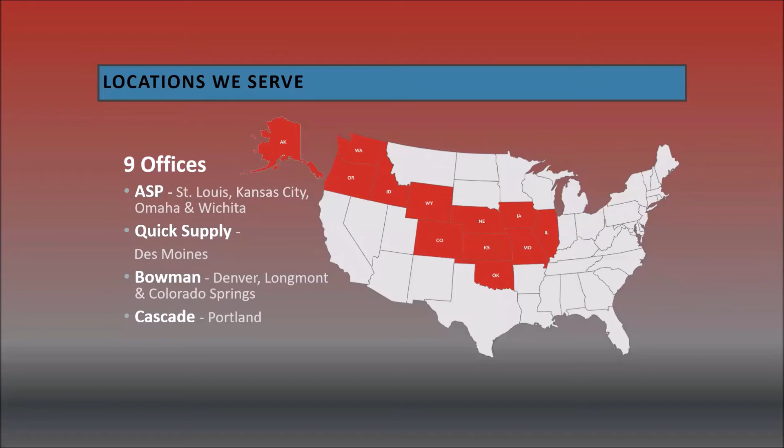I will not expect Tim Lancaster to say ASP Enterprises, Quick Supply Company, Bowman Construction Supply, or Cascade Geosynthetics, all four of them. Tim, just call us whatever you want, you can just say ASP or whatever term you feel comfortable with. Thanks, Bill. Yeah, you bet.

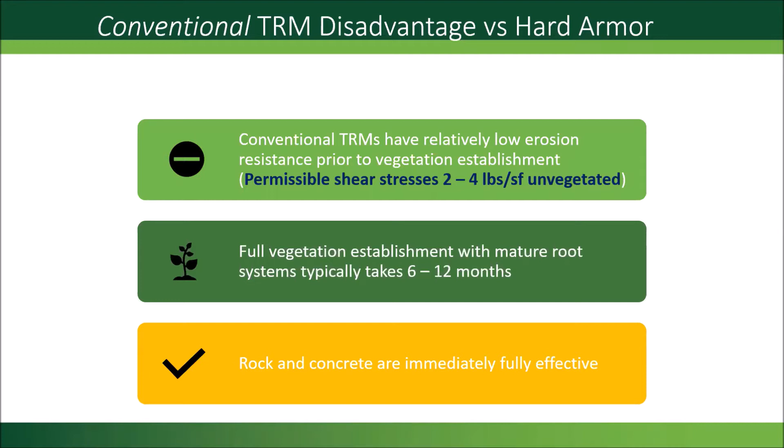One other thing that's exacerbating the whole issue is climate change. It seems like we're getting 100-year storm events coming about every 2 weeks now. Basically what that's doing is just increasing the odds that you're going to get a major storm event on your job site before these types of products become well vegetated.

So that brings me to the InstaTurf products. We refer to these products generically as hybrid turf instant armor mats. They were developed as an effective soft armor alternative to rock riprap for high flow applications. They're really the only soft armor mat or mat type products out there today that give you immediate erosion protection equivalent to a very large diameter rock. They give you 3 to 4 times the unvegetated permissible shear stress of your conventional TRMs and HP TRMs. I think of these products as kind of a hybrid vegetative armoring system.

So you've got the simulated turf that protects, establishes, and then goes on to reinforce the natural vegetation that grows up through it. The way the products are used, you're basically putting seed down first, and then the natural vegetation grows up through the simulated turf.

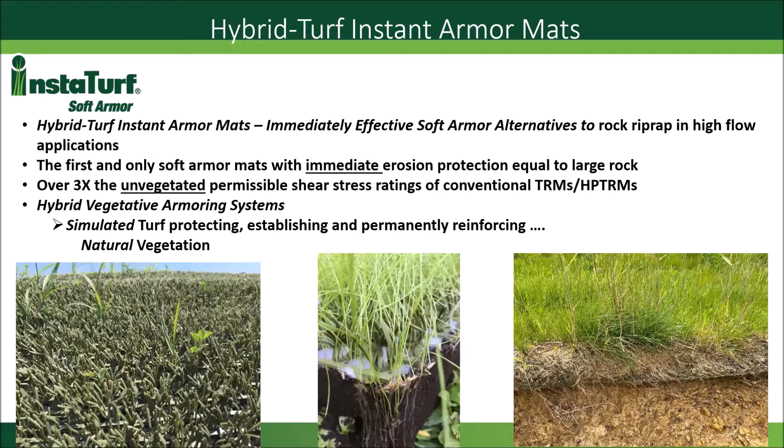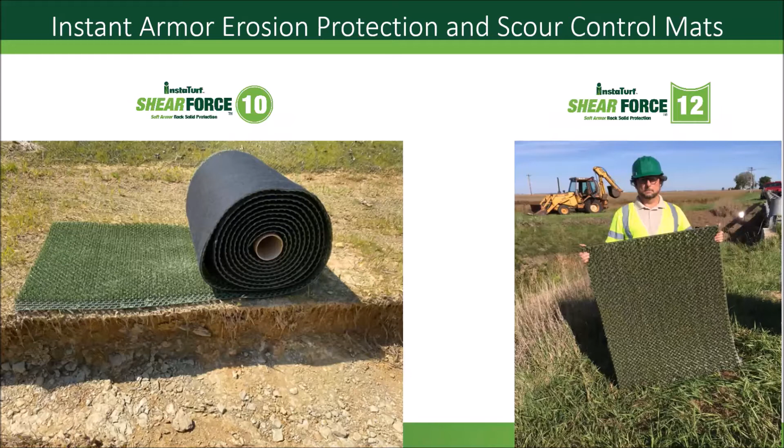So there are 2 products in the lineup. One is called ShearForce10. It comes in roll form like your conventional TRMs. That's the product you see to the left there. And then the ShearForce12 comes in a panel form. It's a 3 foot by 4 foot panel, and it actually has a half inch rubber core incorporated into it for increased weight and ballast effect in more turbulent flow conditions.

With the ShearForce10, it's basically a monolithic UV stabilized polyethylene structure, simulated turf. We call it monolithic because it's all molded into one piece, so there's no stitching or weaving involved. On the bottom side of the turf is a very lightweight polyester fabric. It took us quite some time to develop that fabric because it had to be open and somewhat loose enough to allow vegetation to emerge up through it, but at the same time provide some filtration characteristics to hold fine soil particles in place. As I mentioned, the product comes in roll form.

Rolls are either 3 foot wide or 6 foot wide by 45 feet long. The 3 foot wide rolls weigh about 50 pounds apiece, and the 6 foot wide rolls weigh around 100 pounds. As for installation, you're putting seed down.

Basically you prep the soil first, put the seed down, and then install the product over the top, usually with minimum 8-inch wire staples or sod staples. Sometimes longer fabric pins or even rebar stakes are used, depending on the type of soil you're anchoring into. The nice thing is, once the product vegetates, you can simply mow right over the top of it to maintain the vegetation.

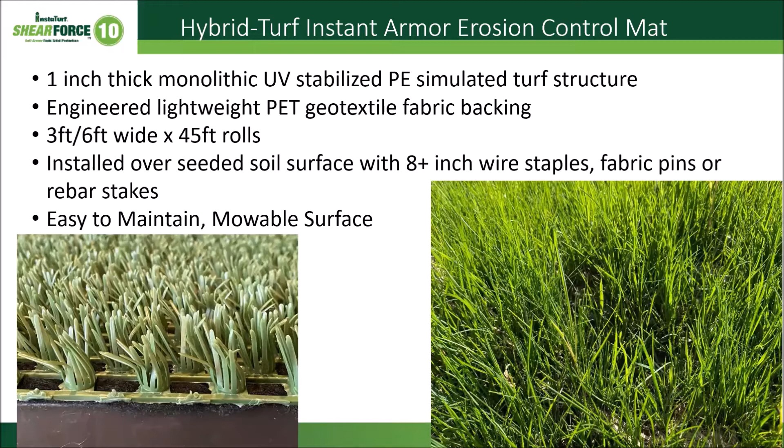Some people look at the product and think, oh, it's just artificial turf, and that's all it's ever going to be. But that turf is actually quite functional in terms of erosion protection. With the grass blades situated perpendicular to water flow, they're basically creating an elevated shear plane above the soil surface, which prevents a lot of the erosive force from acting upon the soil beneath the mat.

The fabric on the bottom basically does two things. One, it acts as a filtration fabric to keep the fine soil particles in place and keep those from being pulled out of the turf under high flow conditions. And the fine filaments within that fabric, especially if you have a cohesive, clay-based soil, when they get wet, they basically stick to the soil and help lock things into place.

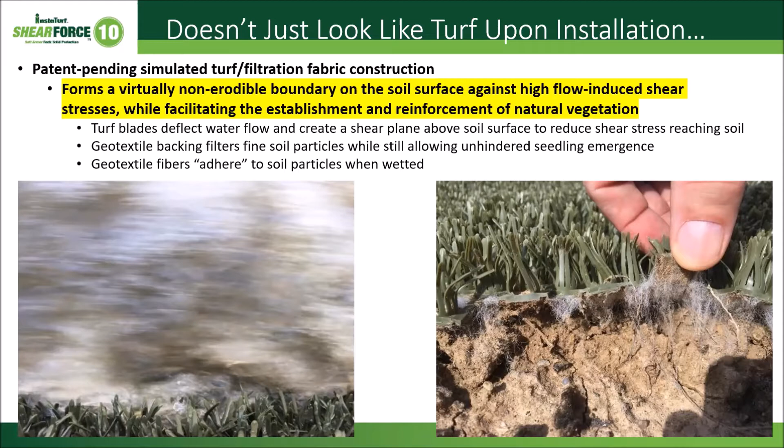The testing we've done on this product was done under the ASTM D6460 large-scale channel testing protocol. We did our testing on the product without vegetation. If you're not familiar with this test protocol, they use a 2 foot wide, 40 foot long channel flume. They compact a sandy loam soil into the bed of the flume, and typically when testing turf reinforcement mat type products, they do these tests on a 10% channel gradient.

With our product, we started out on a 10% gradient, experienced hardly any soil loss, and certainly didn't come close to failing the product. So we actually jumped up to a 20% gradient to develop more velocity and shear stress in hopes of failing the product and coming up with a permissible shear rating for it. We actually never did, as you'll see in a bit.

Installation of the product in these test flumes was done with 8-inch wire staples at a rate of 3.8 per square yard. They give you 3 separate test flumes to do these tests in, so there are 3 separate test plots. Within each one, they run 4 consecutive 30-minute flow events.

Basically what they do is take baseline soil measurements before they start your first flow event. Turn the water on for 30 minutes at a fairly low velocity and shear stress, shut the water off, take soil loss measurements from the bed, and then turn the water flow on for another 30 minutes at a little higher velocity and shear. They do that 4 times, trying to reach a point where your product loses a half inch of soil, which is the failure point under this test protocol.

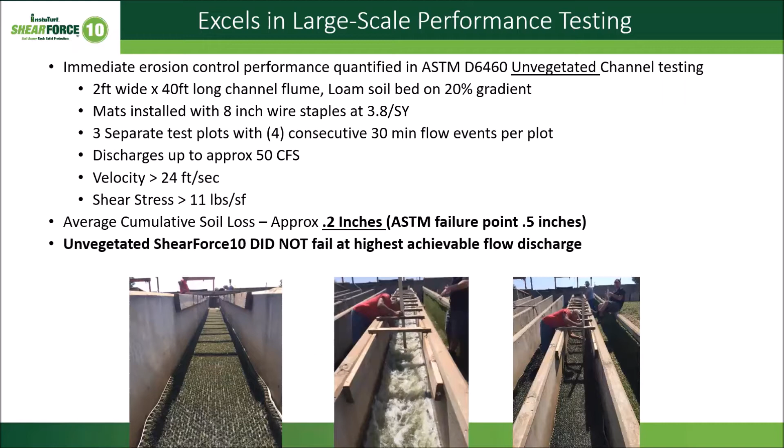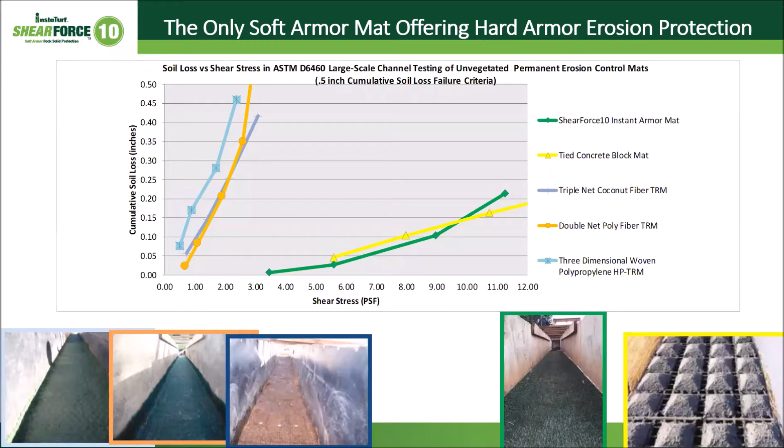Now, we say this product basically gives you the performance of reinforced turf from day one, and this graph kind of shows you that. Here, once again, we're looking at soil loss versus applied shear stress. And the top three graph lines you see there, those are the same TRMs I just showed you, only here they are with 12 months of vegetation growth, so they're considered fully vegetated.

The green line is the ShearForce10 product without vegetation. And you can see from a soil loss control standpoint, the ShearForce10 product actually outperformed these other three TRMs with full vegetation establishment.

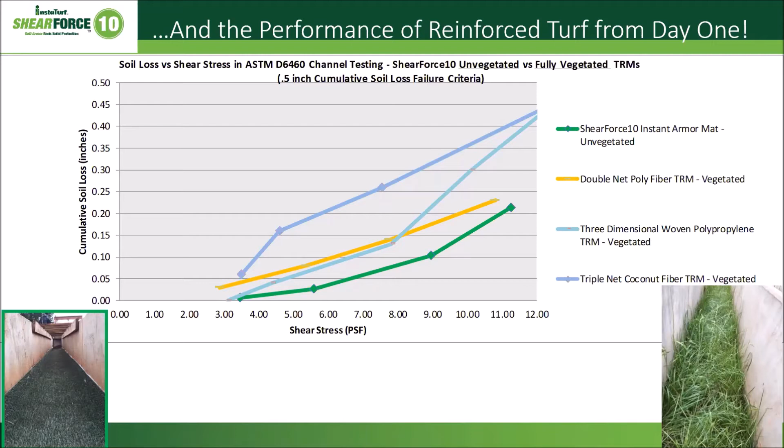So comparing these numbers with rock riprap and these types of products, TRMs are often used or considered for use in place of hard armor materials like rock, and rock probably being the most popular hard armor material out there today. But comparing the numbers or shear stress ratings of these various materials versus rock, your conventional TRMs without vegetation, you see to the left there, typically between 2 and 4 pounds per square foot on a permissible shear rating.

Once they become fully vegetated, that number increases to 12 pounds, usually as a minimum. Some manufacturers with different types of TRMs may publish 14 or even 16 pounds per square foot. The ShearForce10 product without vegetation basically starts you out at 12 pounds per square foot, and once it becomes fully vegetated, we're projecting a permissible shear of 16 pounds per square foot.

So comparing that with some fairly large diameter rock, 24-inch, 30-inch rock, you'll see the ShearForce10 product basically is on par with a 30-inch rock riprap. And those are Federal Highway Administration recommendations for rock riprap.

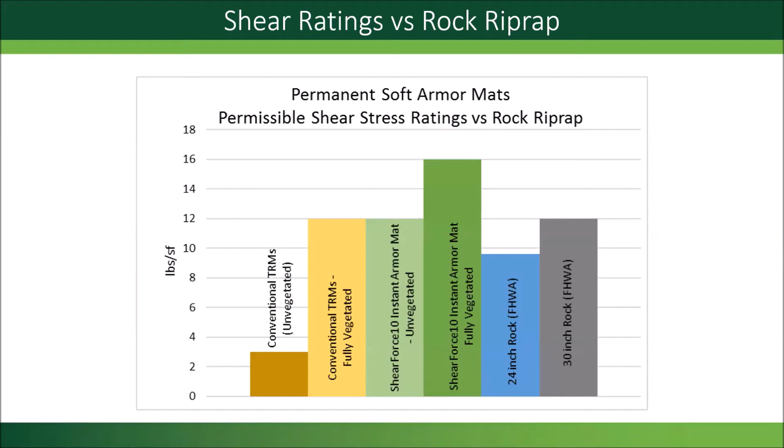So one question I get often when I do these types of presentations in the past has been cost. So I put this chart together here that shows the installed cost per square foot. These are kind of nationwide averages, if you will, because it varies considerably from one state and one location within a state to the next.

But looking at various soft armor materials, starting at the very bottom there, in yellow are your erosion control blankets. Those are your degradable straw, Excelsior, coconut fiber type materials. Those products installed usually somewhere in the range of 15 to 50 cents a square foot, depending on the type of ECB you're looking at, as well as labor rates, so on and so forth. And those products, depending on the type of ECB, can give you adequate erosion protection at shear stresses up to about 2 pounds per square foot.

Once you get above that, that puts you into a permanent material, your TRMs or HP TRMs. And those products being based primarily on synthetic components, they're more of an engineered type product, so there's more QA/QC going into these products in the manufacturing process. Obviously, the products are more expensive, anywhere from 70 cents to $2.25 per square foot installed, and they're good up to about 4 pounds per square foot, depending on the TRM.

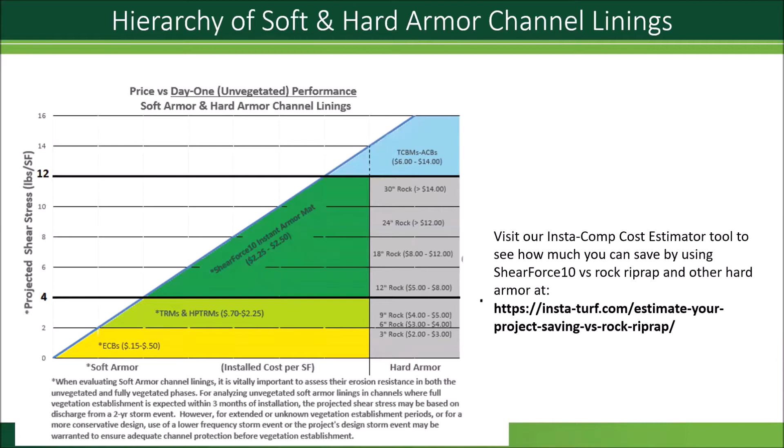Typical applications for the product include high flow channel lining applications, steep slopes where you may have additional discharge runoff coming from a drainage area above the slope, as well as outfalls, downchutes, shoreline applications. I think it's a great application for this product, be it a detention pond, small farm ponds or small lakes, as well as small rivers and stream banks.

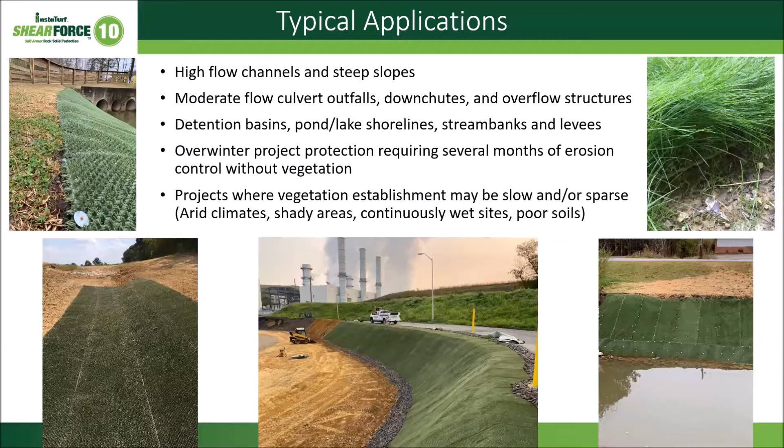Overwinter protection is another use case—say you have a job closing out in late fall and know it will be the following spring before you get good vegetation establishment. This product gives you a very high level of erosion protection until it vegetates, as well as in areas where vegetation establishment may be slow, or once established, quite sparse. That could be due to climatic conditions, arid climates, shady areas on a job site, or wet or poor soil conditions that inhibit a good stand of vegetation from ever developing.

This is one of the applications we did early on with the ShearForce 10 product. This was on a Peabody coal site, and they were looking at using the product in place of rock riprap on other areas of the site, so they wanted to do a test section here.

This is a drainage channel running the perimeter of an overburden cap. It's about a 25-acre cap, with about 13 acres draining into the section of the channel where we installed the ShearForce 10 product. This went in September, early September of 2019. You'll see they've got rock riprap check dams spaced about 75 feet apart along this drainage channel.

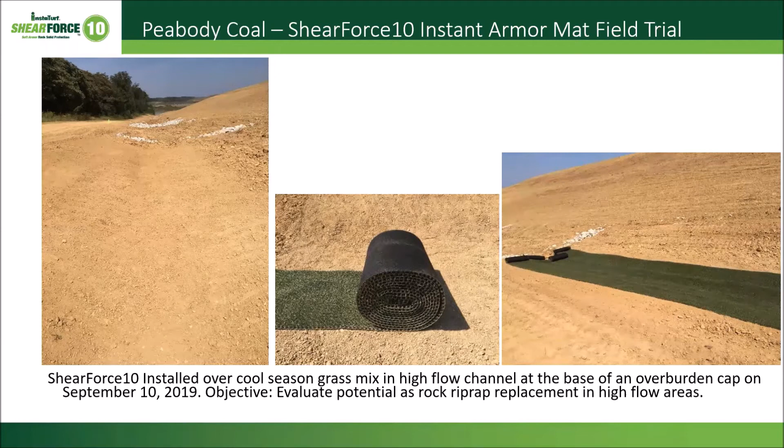When we did the installation, we actually left a couple of open areas downstream and upstream from the test section. Those were just seeded and straw mulched and left as control sections, just to see what would happen in those areas without mat protection.

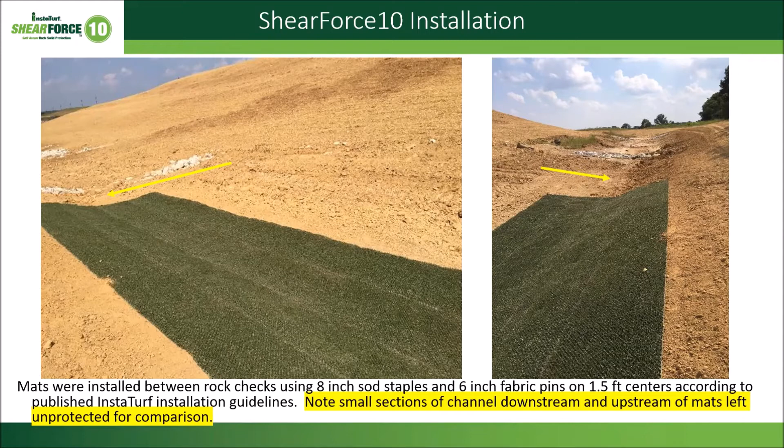This picture was taken looking downstream right after the mat was installed. You can see some of the washer top pinheads on the right side of the picture that were used for installation as well.

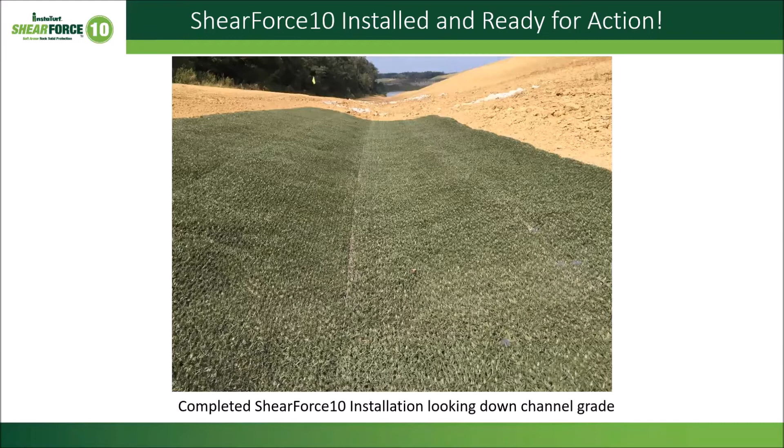This picture was taken about a month after the installation, during which time we'd had hardly any rainfall. I went out to the site not expecting to see a lot of vegetation growth, and I didn't—there were a few small seedlings germinated and emerged up through the mat, but not a lot of vegetation growth at that point due to lack of moisture.

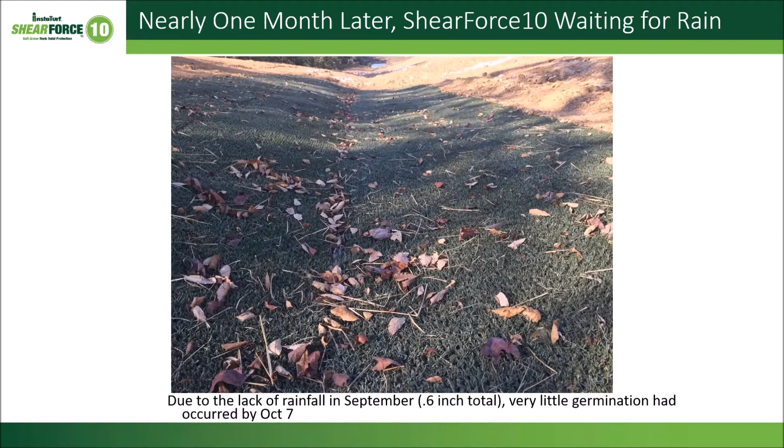Just two weeks after that picture was taken, the rain started. On October 21st, the site had over 1.5 inches of rain, and about a week later, over 2 inches of rain. I got back out there in mid to late November, and since that time, through October and early November, they'd had between 6.5 and 8 inches of rainfall. So the site saw a lot of rain in the early to mid-fall months.

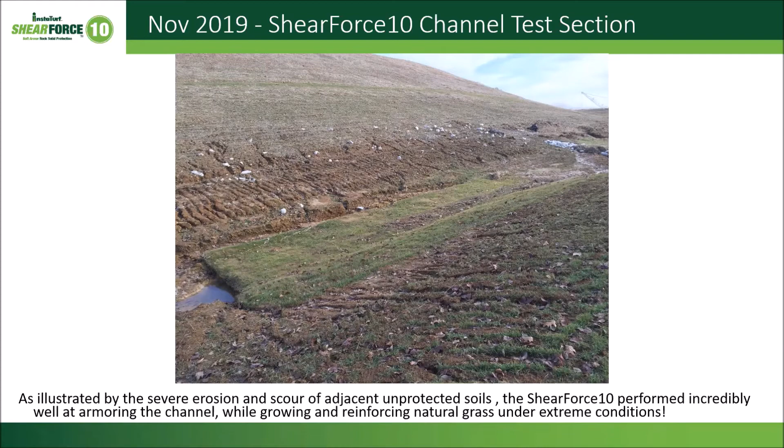The picture to the left was taken the day of installation, and the picture to the right was taken on November 20th, showing quite a bit of good vegetation growth up through the mat.

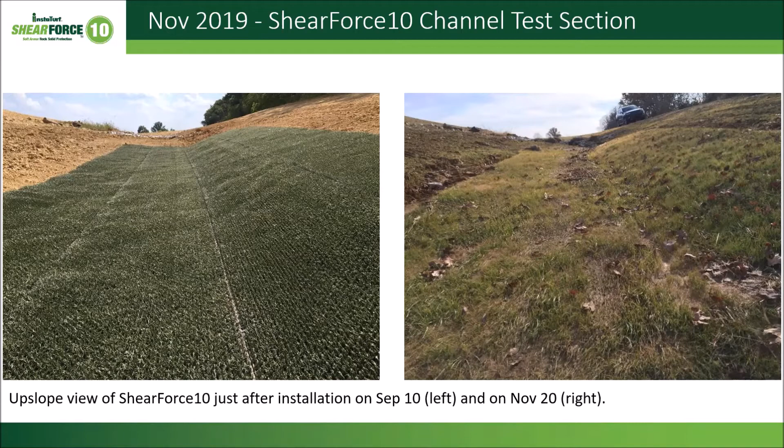So when we did the installation, one thing we didn't do is use enough of the ShearForce10 product. This was by accident, although it's made for some very cool photo opportunities, if you will. When we installed the product, we thought we went wide enough on the channel.

We thought we had the right side slope of the channel covered as well, based on the expected flow depth and wetted perimeter. But we didn't, and what happened was all this rainfall and runoff came and basically scoured out right next to our test section. That shear face you see on your screen is right where the edge of the mat is, where the mat protection stops. At this point, it's about 6 to 8 inches deep and 2 to 3 feet wide.

The picture on the right side of your screen is a close-up of that ledge where the edge of the mat is and where it stops. There's actually one of the staples we use for installation just dangling there from the bottom of the mat off that ledge. It's interesting, and it really exemplifies how well this product can work in terms of controlling erosion under some pretty significant runoff and channel flow.

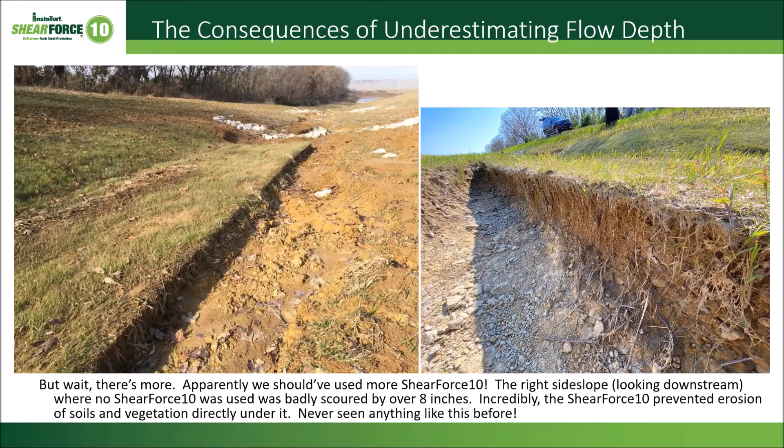This was taken in May of 2020, the spring of the following year. The picture on the left was taken early May, and late April they came in and filled that gully in, and I think tracked over it to compact it. Then by the end of May, we had enough rainfall during that month to basically wash out all that fill soil again. You can see the rocks that have collected in that gully, and those were washed in from that check dam upstream.

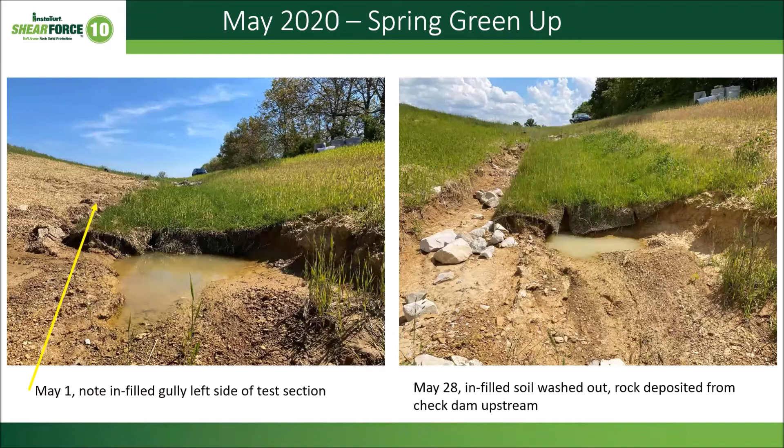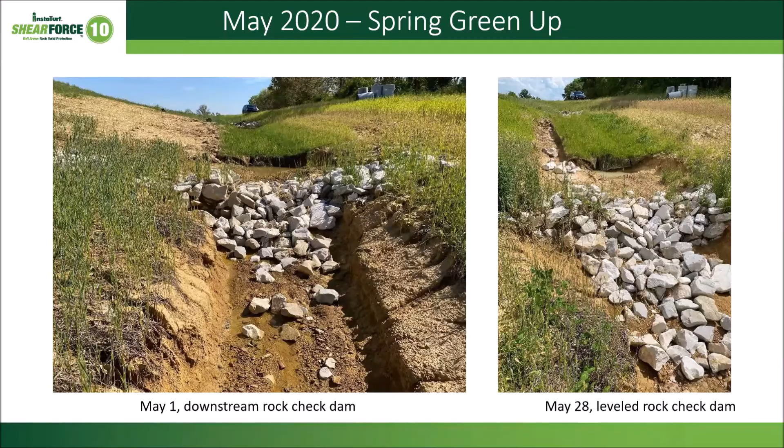This is a little farther downstream looking upstream, and this is the riprap check dam right down from our test section. On May 1st, you can see quite a few of the rocks had washed out of it, and you can see the gully that's formed right below the check dam. Then on May 28th, the picture to the right, basically at that point, the riprap check dam had just been leveled, pretty much flattened out. And that gully had gotten even larger there below the check dam.

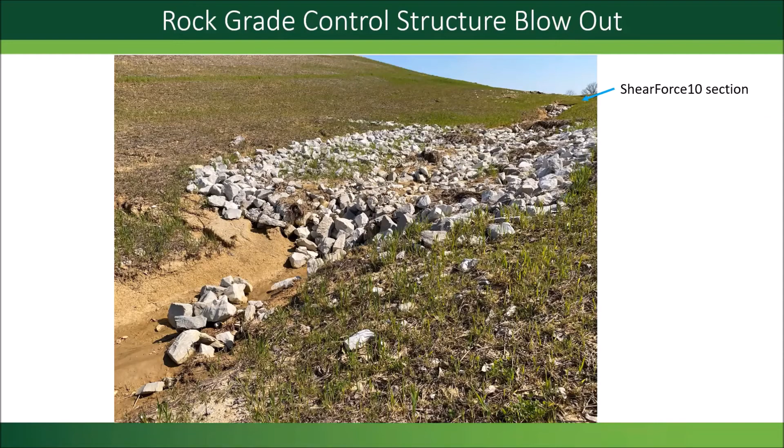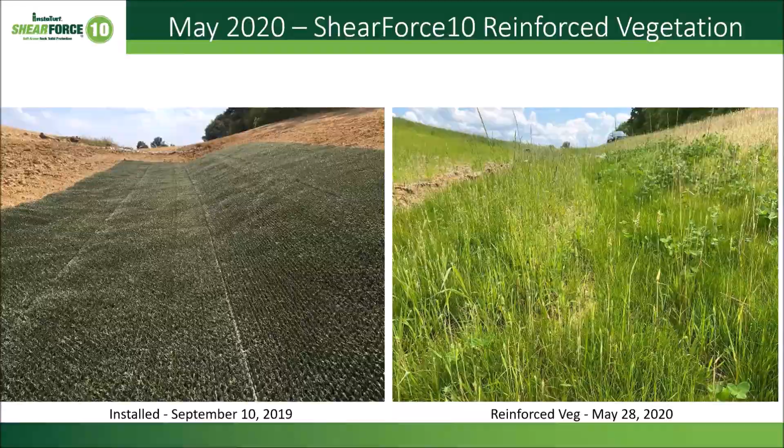Just a more recent update on this job. We got out there early March of this year, and it hadn't really greened up much yet. All the grasses were still dormant at the time. By now it's probably looking pretty green, but there was some green in the channel because they had some clover move in, and the clover was still green, but all the grasses were still dormant and brown.

The riprap check dam right down from it, you can see it's pretty much blown out completely at this point. And that gully, it's kind of hard to tell in these pictures, but the gully is probably about 5 feet deep at this point.

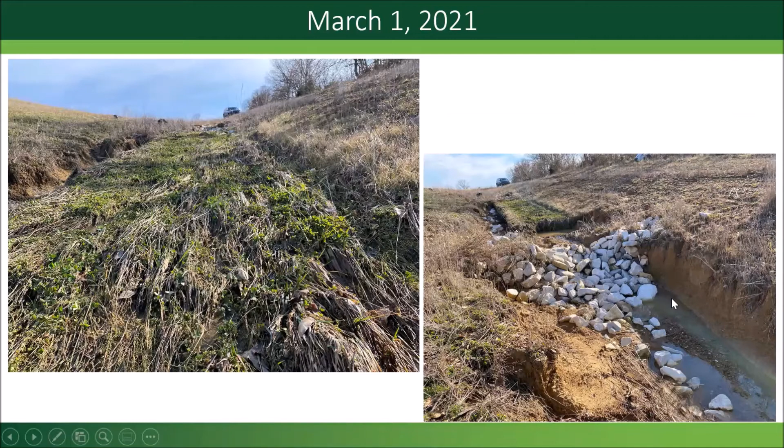Another application for the product, this was done on Peabody coal as well, stream bank stabilization. It was a situation where they had these constructed streams. They had to build like 170 miles of these streams to replace some of the drainage areas they'd mined through. This particular stream, they'd just finished it in late October, and they knew it would be the following spring before they got good vegetation growth there. So they were looking for something to lock the stream banks down with.

So they used the ShearForce10 on the banks. The Army Corps of Engineers would not allow them to use anything on the bottom of the stream, but they could put it on the banks. That winter in this area we had maybe 5 inches of snowfall total, and the rest of the precipitation came as rainfall, very heavy at times. I think we probably had at least 6 two-inch storm events between late October and early March that year.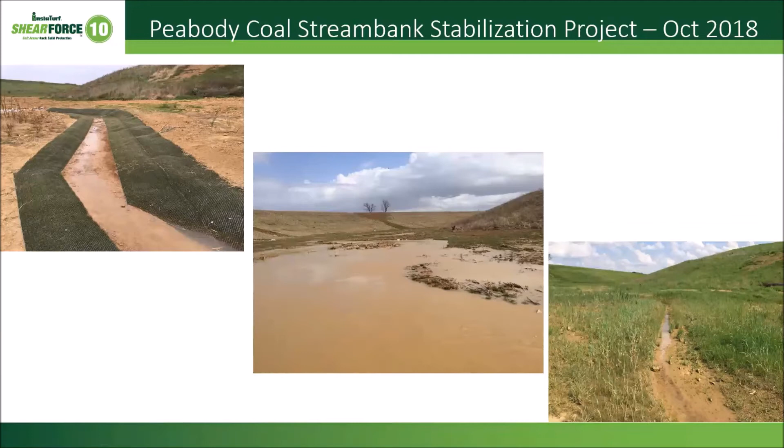So channels, stream bends, areas with higher velocity and higher shear stress - the product's great for those areas, even if you're using maybe a conventional TRM in a straight reach of the channel. Where you've got higher shears and velocities on the bends, you could use the ShearForce10 product.

The picture to the left shows a bend area on this stream where a coconut blanket was used, and the blanket had literally gotten stripped off the bank. A lot of the fiber had been stripped out of the blanket itself, and then the bank started to undercut. The other two pictures show ShearForce10 on one of the bends, and the picture to the right shows that same bend about a year and a half later with good vegetation establishment and stability.

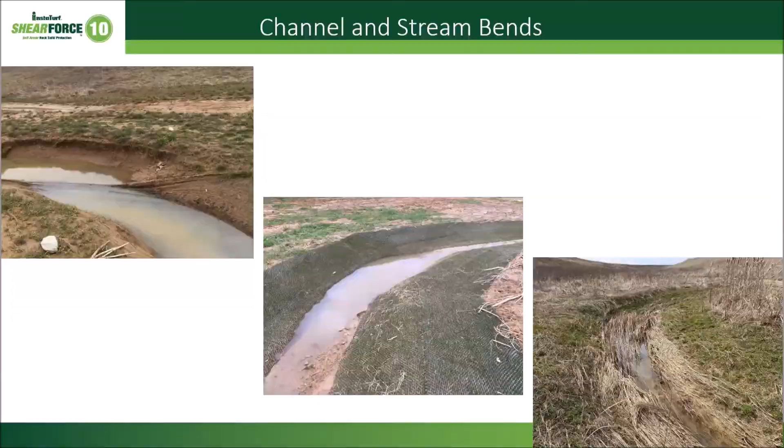This was another job we did with Dominion Energy out in Virginia. This was an outfall area feeding into a drainage channel. It's interesting because on this particular project, they had previously used another degradable erosion control blanket and a permanent TRM along with sod, and they kept having washouts and erosion issues on the site. They were about to come in and just dump rock in here, but our distributor in that area came in and talked to them about the ShearForce10 product.

They thought they'd give a vegetative option one more shot, so they installed the ShearForce10 in late July of last year. Within two weeks of installation, one of the hurricanes that came up through the southeast last year hit the site, dumping like 4 inches of rain. There was a lot of flow in the outfall area and drainage channel, but they didn't have any noticeable erosion. They were surprised at how well the product held up and held everything into place. By early to mid-September, they had some pretty good vegetation growth in that outfall area, which you see to the right.

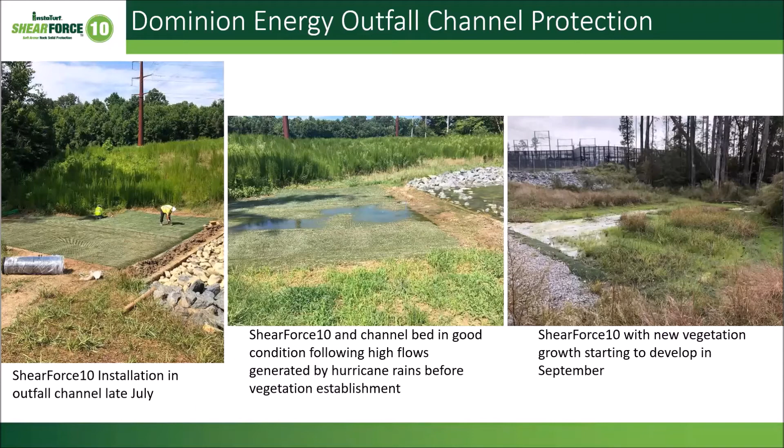Shoreline armoring with the product, as mentioned earlier - detention and retention ponds, small streams and small rivers. It's probably not going to be used on a very large river, say like the Ohio River, except maybe in some protected areas, but stream banks, shorelines, those types of applications, the product is very well suited for. The picture to the right shows that line of vegetation right at the toe of the bank - that's right where the ShearForce10 mat stopped. So the mats basically held all the seed and soil in place and allowed the vegetation to develop and establish right at the very toe of the bank.

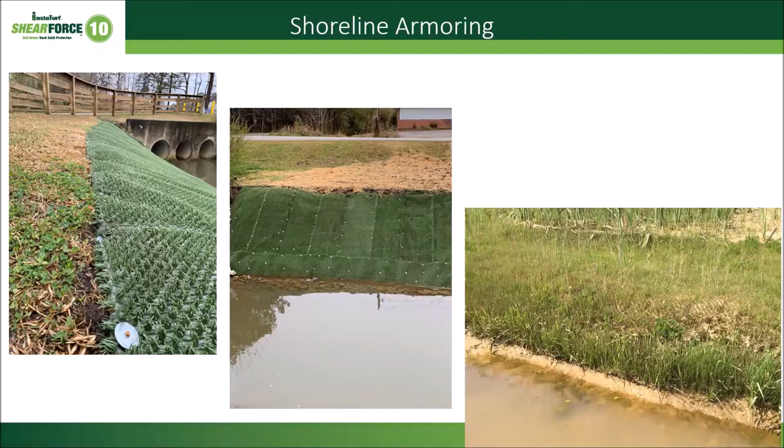The bioretention swales and pond areas - this picture to the left shows they used a combination of ShearForce12 and ShearForce10. They used the ShearForce12 mats in the bottom here and used the ShearForce10 rolls up on the sides of this bioretention area.

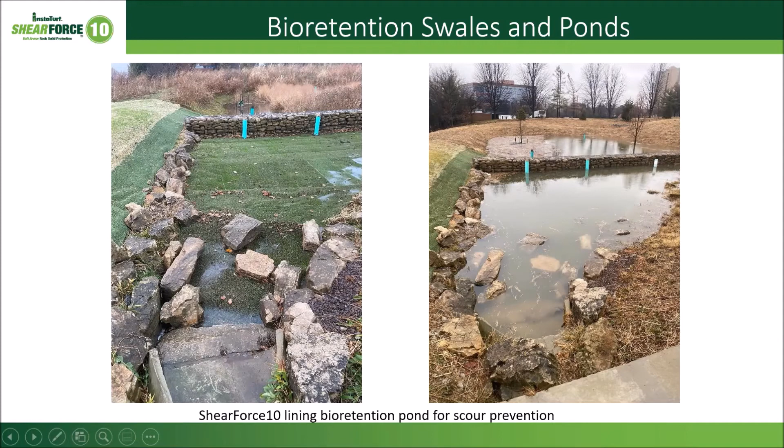Solar farms is another growing application for these products. We've been involved with about 6 solar farms now, primarily in the southeast and mid-Atlantic area. They're using the product under the drip lines on the panels to control erosion, as well as back under the panels because sometimes they have trouble getting vegetation growing there due to shading, and also in their drainage channels. Some of these sites are huge, over 1,000 acres, with a lot of drainage swales and outfall areas where they're using the ShearForce10.

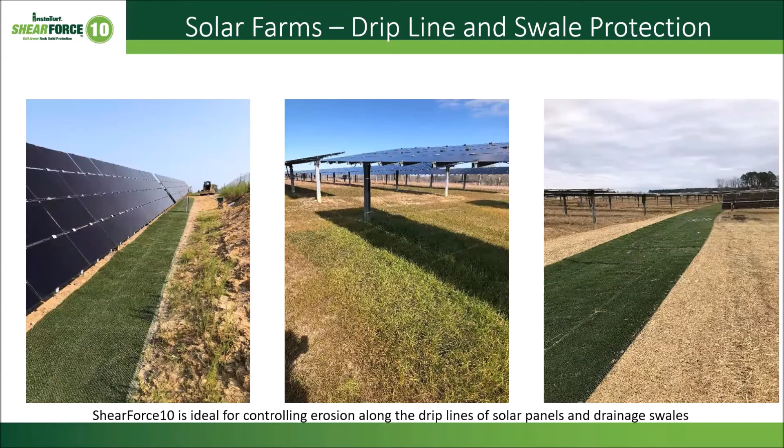This is an oil containment berm, steep slope, out in eastern Pennsylvania. This berm originally had a geoweb, a geocellular confinement system, installed. Over time, water had gotten under it and eroded out the soil from under the geoweb. So they came in, stripped that off—you can still see some of that in the picture to the left, far left side—prepped the soil, seeded it, and installed the ShearForce10 product in place of that.

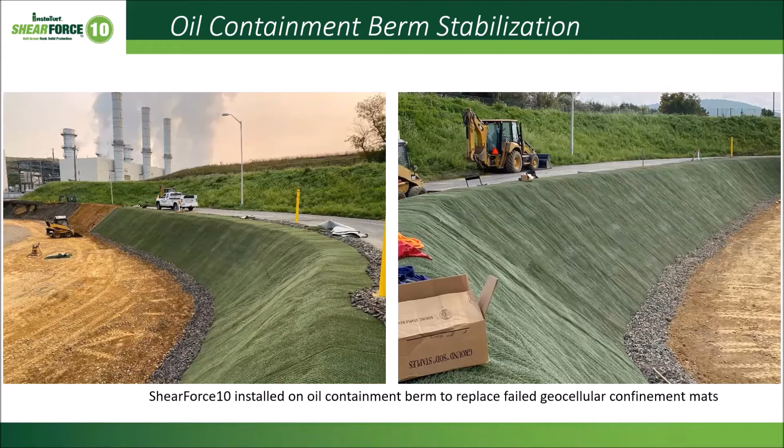Installation is very important with these types of products, both conventional TRMs and instant armor mats, and it boils down to two key points. One, you want to ensure and maintain that the product has contact with the underlying soil, which requires good soil preparation. You want the soil fairly smooth, which is also key for good seed germination, to get good continuous soil contact with the bottom of the product. And then the use of proper anchors and staples, with the proper number and pattern, ensures good soil contact to begin with and maintains it through and under flow conditions.

And then keeping water flow on top of the mat. You're going to want to trench the edges and secure your seams so the water flows on top of the mat and doesn't get under it and breach those seam areas. Once erosion starts to occur underneath the mat, the product isn't going to work like you want it to. So for installation guidelines, we publish guidelines for various applications on our website, available in PDF format as well as DWG for use in CAD.

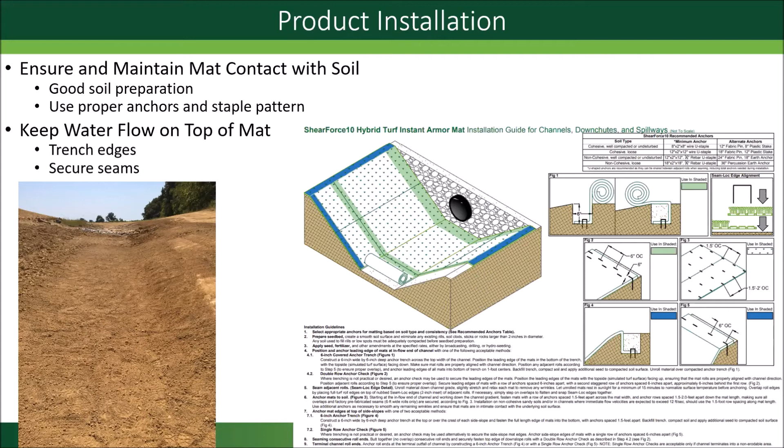On installation, for a channel application, you trench the head of the channel with the product, like you see in the picture to the left. When overlapping product with our product, we've incorporated what we call a Seam-Loc edge or end. One edge is fairly flat, inset about 3 inches on the side of the product, and that edge has fabric on the bottom. The overlapping edge, on top, has full turf but no fabric. So when running these rolls side by side to form the seam, you get a built-in shingle effect, and then you run your anchor through that seam area.

That's built in to provide a seam that's nice and secure. It won't allow water to pass through, but it will still allow vegetation to grow up through it, and it looks very natural—you don't have a big bump or hump where the product is overlapped.

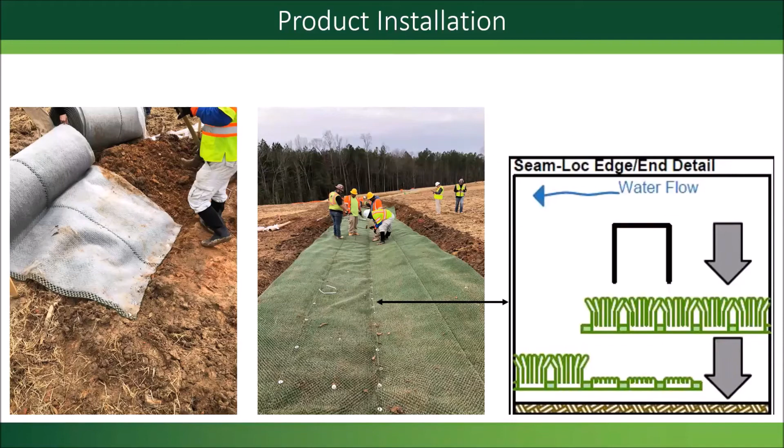For cutting the edge trenches, they come in and use a piece of equipment to cut the trenches, then backfill those trenches and track over them to compact it. By the time installation is done, you should have something similar to what you see in the picture to the right.

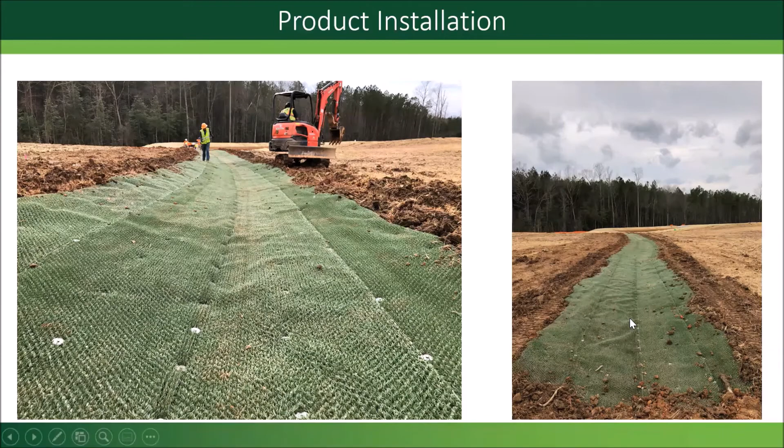That brings me to the ShearForce 12 product. The only difference between the ShearForce 10 and 12 is the 12 incorporates a 1/2-inch rubber core with 1.5 inch holes to allow vegetation growth up through it. These come in panel form, 3 foot by 4 foot panels, weighing about 30 pounds a piece, so they're easy for one person to handle and lay.

I don't know if you're familiar with some of the other scour or transition mats on the market today, but those other scour transition mats all require a separate underlay, be it an erosion control blanket, a permanent turf reinforcement mat, or sometimes they'll put sod down first and then install the transition mat over the top. With the ShearForce 12, you don't need the separate underlay. You're basically going to prep the soil, seed, and then install the ShearForce 12 panel over the top and let the seed and vegetation grow up through the panel.

Installation of this product is typically done with a 12-inch heavy gauge wire staple. Sometimes they'll use even heavier, like number 3 rebar, or even earth anchors in some cases if they're going into a fairly loose or muck type soil. And then just like the ShearForce 10, once this product vegetates, you can simply mow right over the top of it.

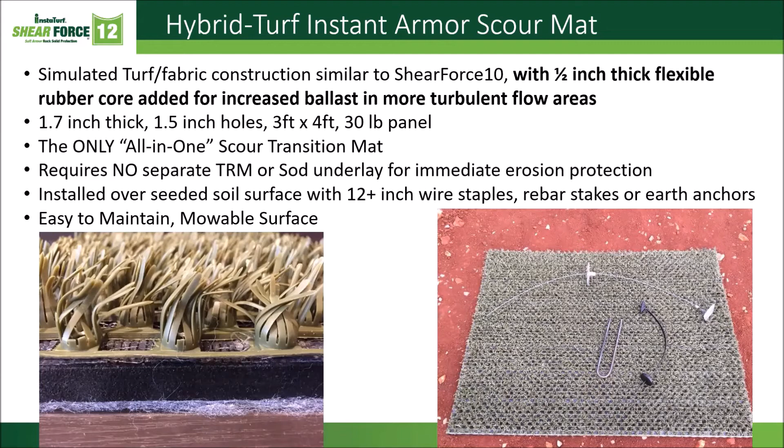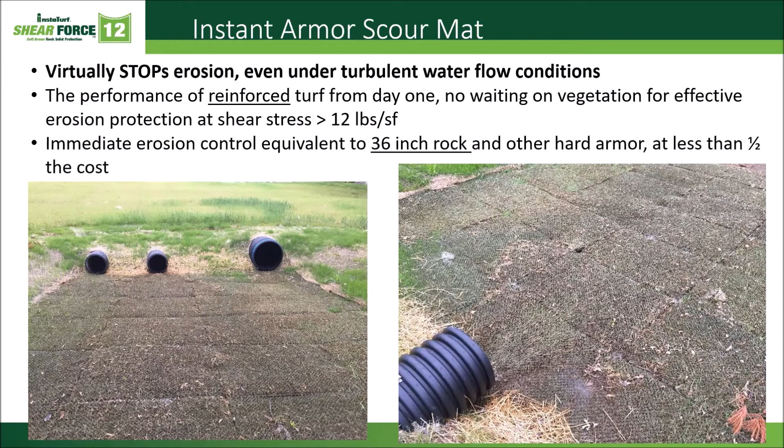This product's going to give you a very high level of erosion protection as soon as you put it down, pretty similar to a 36-inch diameter rock. That makes it really ideal for areas prone to scour, like your pipe and culvert outfalls and other areas where there's a lot of turbulence in the water flow.

Testing on this product was done using the same ASTM D6460 protocol, and as you might imagine, it did not fail in this test as well. With this product, our average soil loss was only one-tenth of an inch, so it did slightly better than the ShearForce 10 product, but certainly didn't come close to the half-inch failure point.

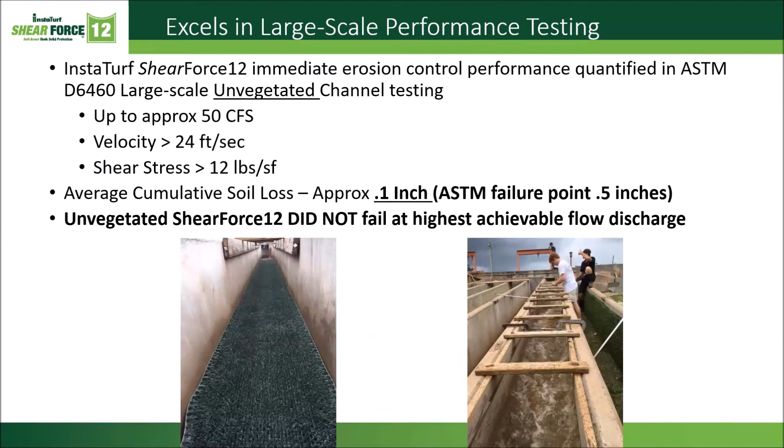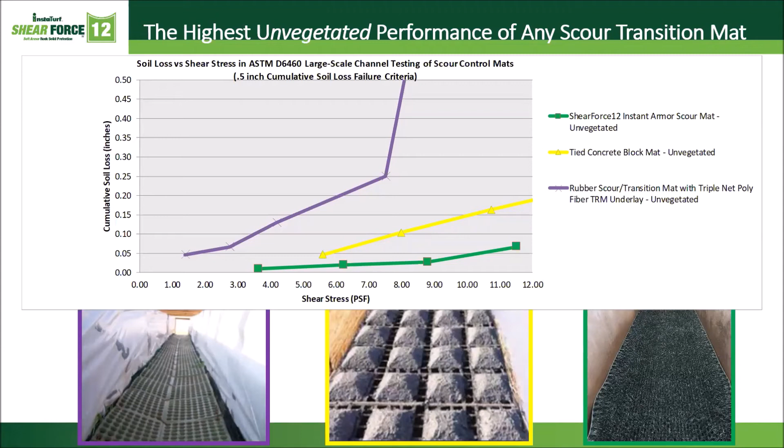Typical applications for the 12: culvert and pipe outfalls are probably the most common application for the product, but it's also good for use in areas where there's considerable turbulence in the flow, or even some mild wave action, be it pond or lake shorelines. Also, we're seeing the product used for downspout protection, something we never really thought of, but some contractors and engineers thought it was a good idea.

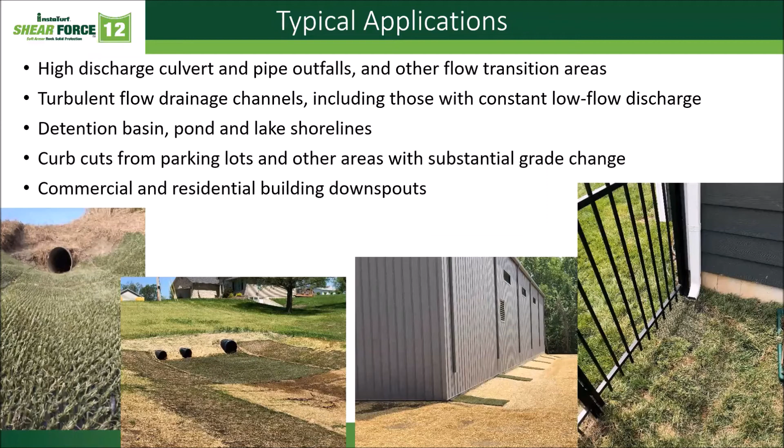They're using it for commercial building downspouts as well as residential. Sometimes they'll take one of these 3x4 panels and cut it into strips and use it right at the bottom of the downspout on a home. What they do is seed first, and once the grass grows up through it, they can just mow right over the mat. So culvert and pipe outfalls, like I said, is the most popular, most common application.

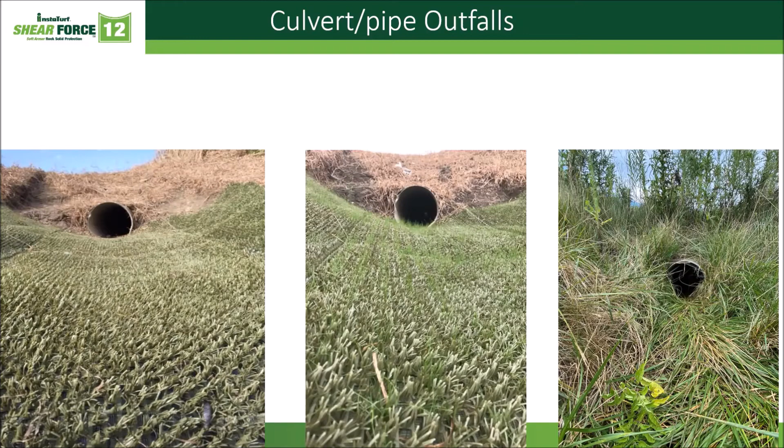The picture to the left here was taken day of installation. The picture in the center was taken about 30 days later, and you can see the new grass growth up through the mat there. The picture to the right was taken the following spring, and this was originally installed in the fall. Following spring, you can see the dominance of tall fescue taking over the area where the mat's installed.

Curb cuts and berms are really good applications for the product. In my area and over in the St. Louis area, they love to come in and just dump a pile of rock right there at the end of the concrete, a little concrete chute. What often happens is water finds its way around the rock, starts eroding around the rock, or they'll come in and spray all the vegetation around the rock with Roundup or what have you.

That kills the vegetation back, and basically just exacerbates and adds to their erosion problems. So in these types of areas and applications, they could come in and use a panel or two of the ShearForce 12 product, let it vegetate, and then just mow right over the top of it whenever they need to.

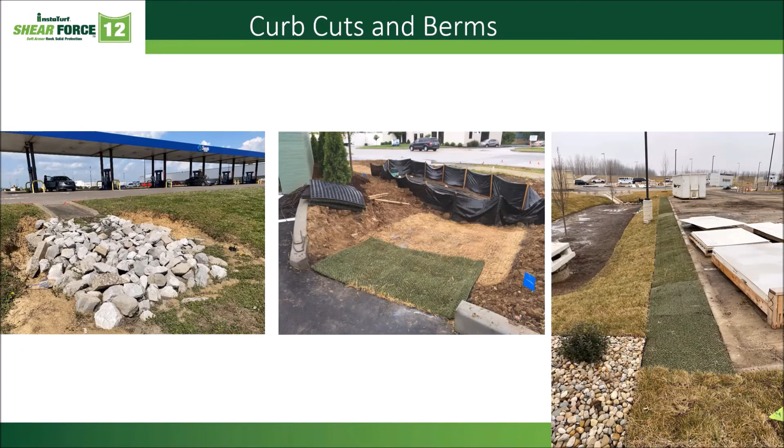And just to wrap up the products here, they're really developed to help you handle the extra flow that we're seeing from climate change and storms, heavier storms, more frequent storms associated with climate change. They give you a lot higher unvegetated permissible shear stress protection than your conventional TRMs and woven high performance TRMs. And they do so at a lower cost than using rock riprap and other concrete-based materials.

And they also give you a look at vegetation as soon as you put it down. They kind of look like grass. And so it looks natural, looks green. And then if the vegetation ever dies back, you still have that look.

One thing I haven't mentioned so far is we use infrared reflective pigments in these products, in the polyethylene. That basically helps protect the product from UV light, but it also helps reduce heat load buildup within the product when it's exposed to direct sunlight, especially in the summertime. What we found with a lot of these polymer-based materials is, and you have this in concrete too, polymer-based materials in the summertime, exposed to direct sunlight for any amount of time, can heat up enough to burn new vegetation growth.

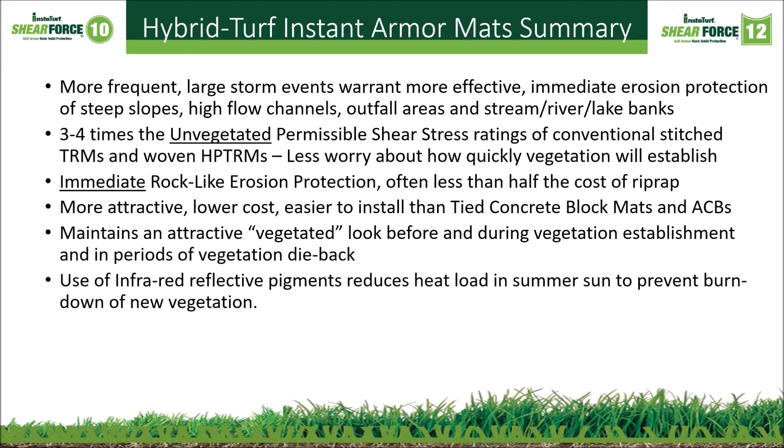So we've rolled these infrared reflective pigments into the product to reduce that heat load buildup. And these pigments are also used in other building materials like decking and siding for homes, to keep your deck from burning the bottoms of your feet in the summertime.

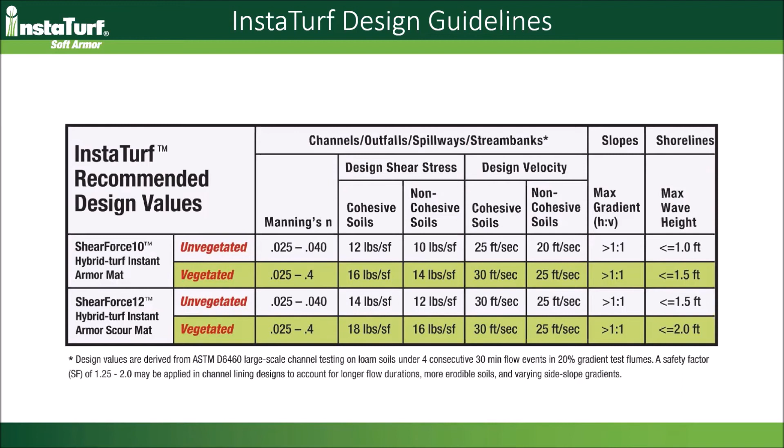From a design standpoint, installation, case studies, project case studies, all the information on these products are out on our website, as well as the ASTM test reports. We have design guidelines, permissible shear values for channel lining applications, as well as your slope and shoreline applications. And then all that's out on our website.